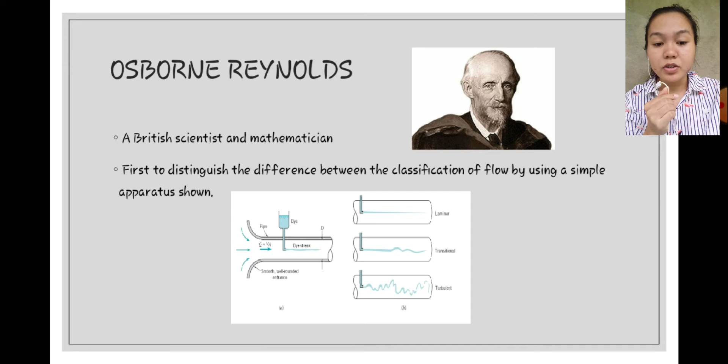From range 1, he classified this flow as laminar when the Reynolds number is 0 to some critical value at which transition flow begins.

In range 2, he called it transition flow. These flows in this range may fluctuate between laminar and turbulent flow. The fluid flow is on the verge of becoming turbulent.

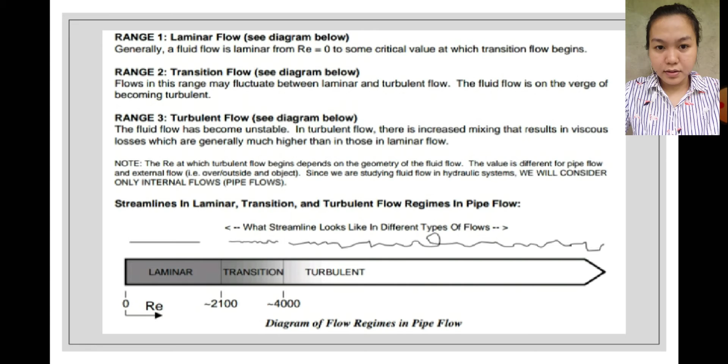Next, the history of Reynolds number. Osborne Reynolds famously studied the conditions in which the flow of fluid in pipes transitioned from laminar to turbulent flow. In his 1883 paper, Reynolds described this transition in a classic experiment in which he examined the behavior of water flow under different flow velocities using a small stream of dyed water introduced into the center of clear water flow in a larger pipe.

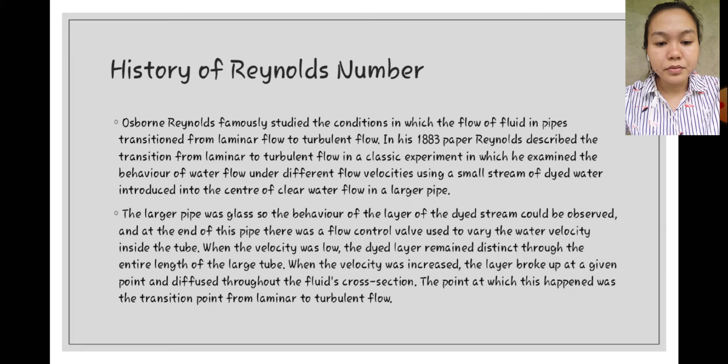This was the formula of Reynolds number introduced by Osborne Reynolds.

The Reynolds number is the ratio of internal inertial forces to viscous forces within a fluid which is subjected to relative internal movement due to different fluid velocities.

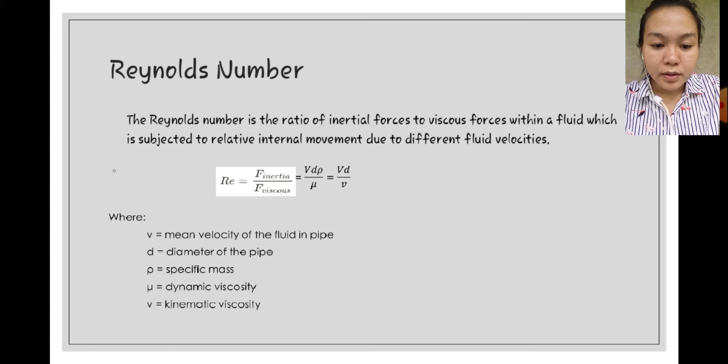The upper limit of laminar flow is defined when the Reynolds number is greater than 2,100 but less than 4,000. The lower limit of turbulent flow, defined by the lower critical Reynolds number, is of greater engineering importance. It defines the condition below which all turbulence entering the flow from any source will eventually be damped out by viscosity. The lower critical Reynolds number sets a limit below which laminar flow will always occur, having a value of approximately 2,100. The region of uncertainty exists between 2,100 and 4,000.

This is the transitional region. For laminar flow, if the result of the Reynolds number formula is less than 2,000, it is considered laminar flow. If the result is greater than 4,000, then it is turbulent flow.

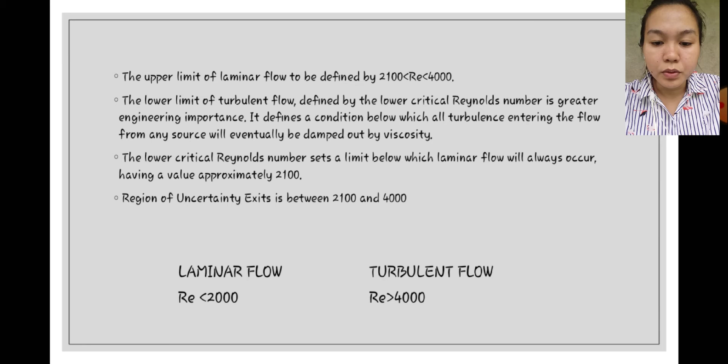So that is the concept of a critical Reynolds number. Next, let's do an example to internalize how the Reynolds number formula is used.

Water of kinematic viscosity 1.15 by 10 to the negative 6 square meters per second flows in a cylindrical pipe with 30 mm diameter. Calculate the largest discharge for which laminar flow can be expected.

What is the equivalent discharge for air, given that the viscosity of air is 1.37 by 10 to the negative 5 square meters per second?

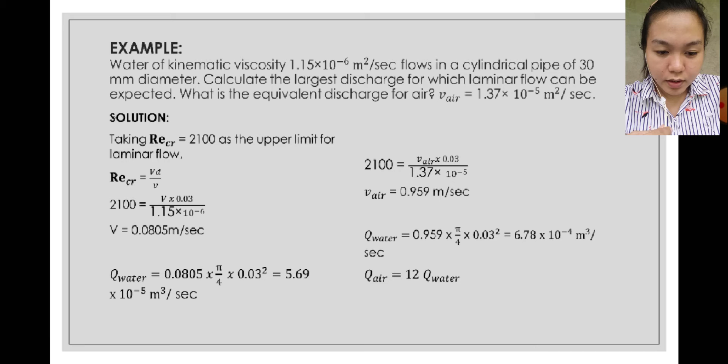Taking the Reynolds number equal to 2,100 as the upper limit for laminar flow, we set up the formula: 2,100 is equal to velocity...

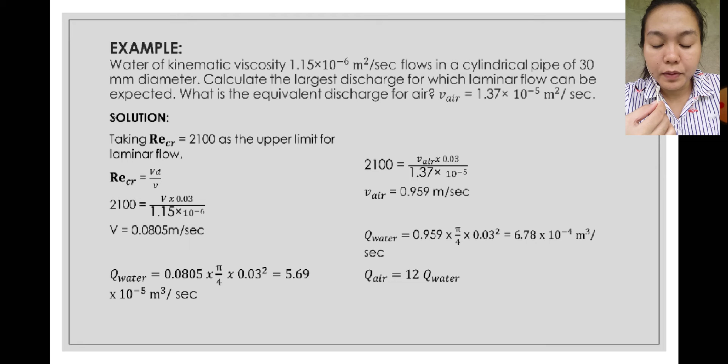Next, we will define laminar and turbulent flow.

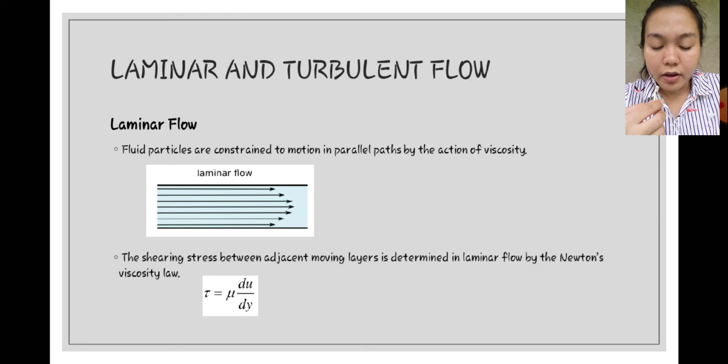Laminar flow: the fluid particles are constrained to motion in parallel paths by the action of viscosity. The motion is straight and parallel because viscosity is high and the velocity of the fluid is slow, resulting in a parabolic profile. The shear stress between adjacent moving layers is determined by Newton's viscosity law. Laminar flow has low velocity and/or high viscosity and is stable against disturbances.

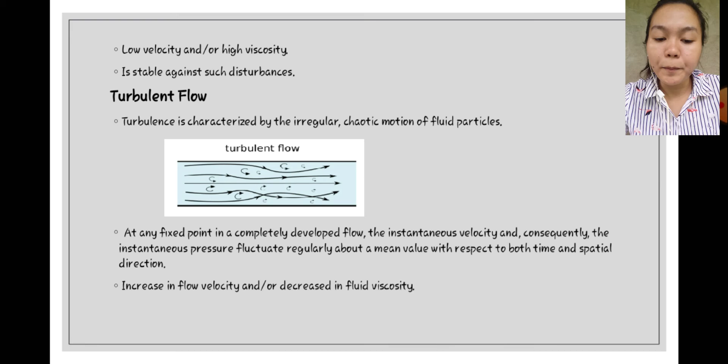That's all for the summarized discussion pertaining to Reynolds number, but I will also present a video regarding this topic so it can be internalized well.

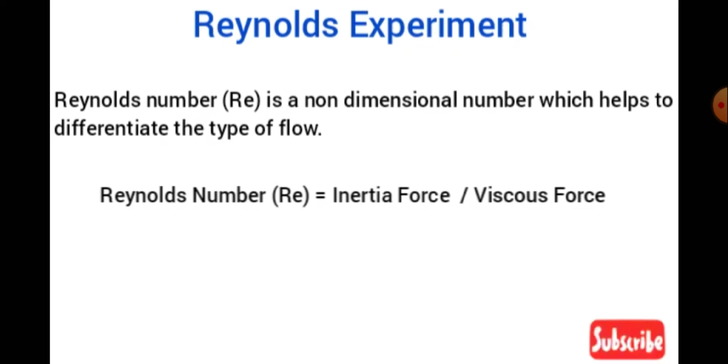Before going to this experiment, let us know the definition of Reynolds number. Reynolds number is a non-dimensional parameter which helps us identify the type of flow. Generally, the Reynolds number is given by inertia force to viscous force. Based on the Reynolds number, fluid flow is characterized into laminar flow, turbulent flow, and transitional flow.

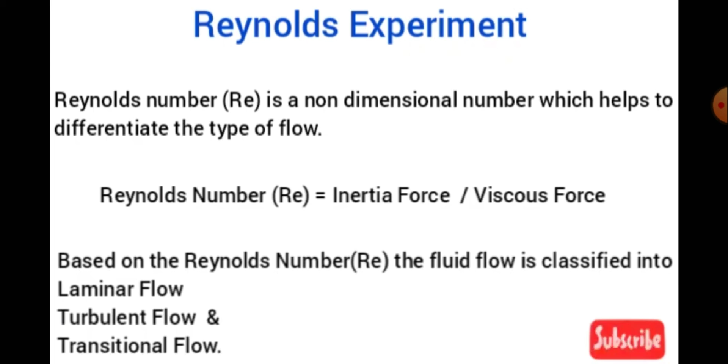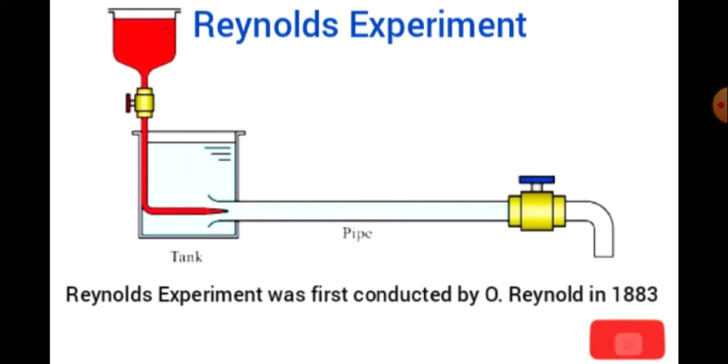To understand these flows, the Reynolds experiment was conducted by O. Reynolds in 1883. This experiment gives a clear picture about how laminar, turbulent, and transitional flow takes place in fluid flow. The experimental setup consists of a water tank, a dye tank, a glass tube, and a regulating valve.

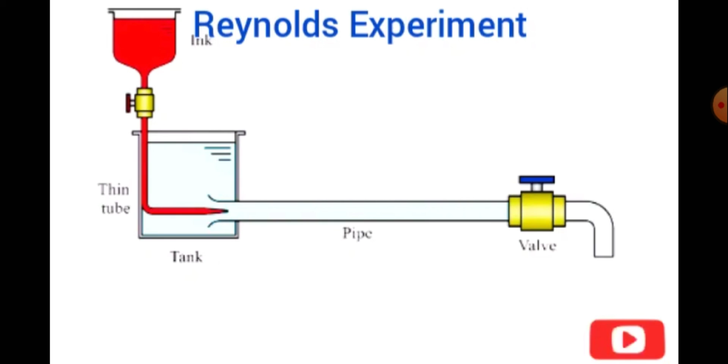In this experiment, water from the water tank is allowed to flow through the glass tube. The flow velocity is varied by operating a regulating valve. At the same time, liquid dye having the same specific weight as water is introduced into the glass tube, and during this operation the following results are observed.

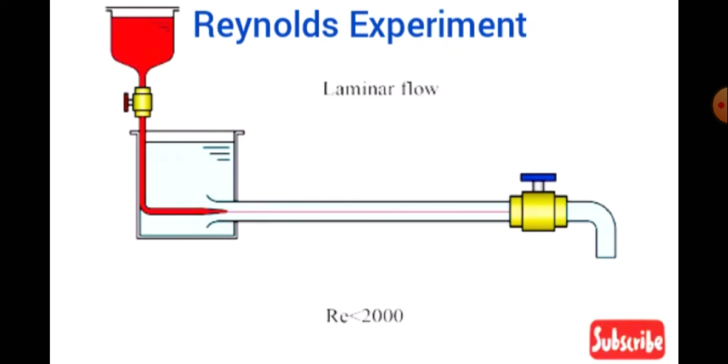At a lower velocity of flow, the filament in the glass tube is in the form of a straight line, parallel to the glass tube, which indicates that the flow is laminar. When the velocity of flow is increased to some higher value, the filament dye is nowhere a straight line and takes on a wavy nature, which indicates that the flow is not laminar.

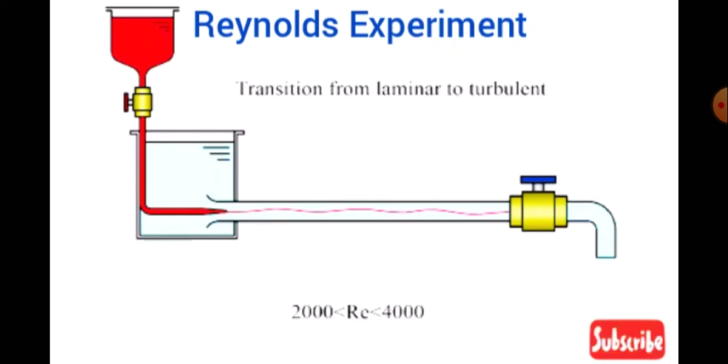When the flow velocity is increased to a higher value, the complete wave of dye disappears and diffuses into the water. This means the fluid particles of the dye are moving in a random fashion, showing the case of turbulent flow. In this case, the mixing of dye filament and water is intense and the flow is irregular, random, and disordered.

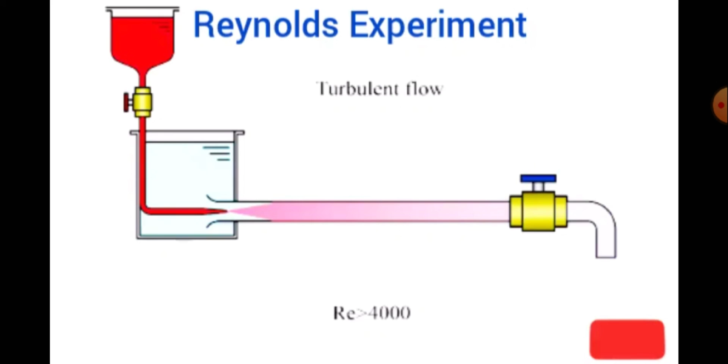In a general case, if the Reynolds number is less than 2000, the flow is known as laminar flow. If the Reynolds number is more than 4000, the flow is called turbulent flow. If the Reynolds number lies between 2000 and 4000, the flow is transitional flow.